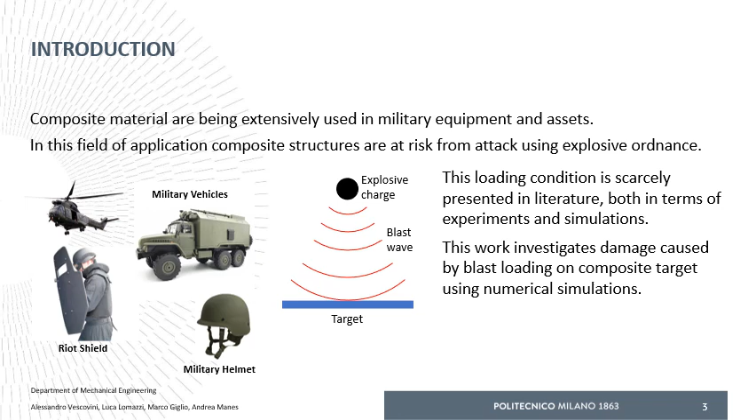This work focuses on composite materials that are being extensively used in military equipment and assets. In this field of application, composite structures are subjected to many risks, and the one we are focusing on is attacks from explosive ordnance. This loading condition is found by us to be scarcely represented in literature, both in terms of experiments and also in terms of numerical or analytical simulation. So what we wanted to do in this work is to investigate the damage caused by blast loading on composite targets using numerical simulation.

This work focuses on replicating damage in a carbon composite panel using the commercial software LS-DYNA. The experimental tests considered to compare with the FEM model are taken from the paper of Gargano and co-authors that is cited in the slide. The paper presents the detonation of a 100-gram spherical Type 4 plastic explosive charge at a 0.4 meter standoff distance from a flat quadrangular composite plate.

The composite is constituted by plain carbon woven fabric, made by 7 plies stacked one on the other, all the plies with the same orientation, being a 0/90 pattern. The composite plate is fixed in a steel frame lined with EPDM 414 rubber foam. The plate has a quadrangular shape, as said, with a 275 millimeter side, while the steel window, still quadrangular, has a 250 millimeter side.

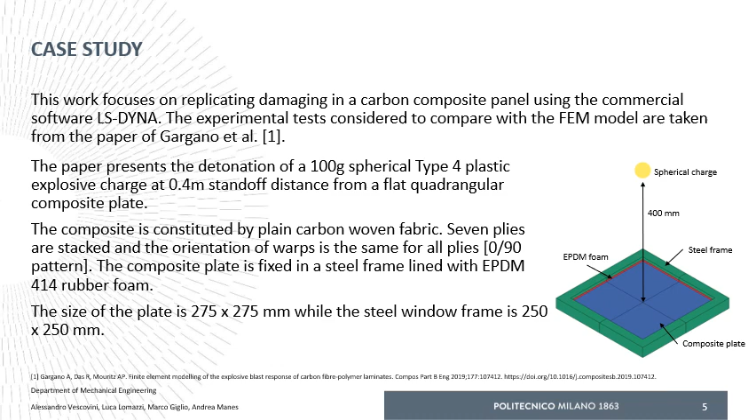In this slide, the two methodologies used are presented. First, the pure Lagrangian approach was used. It consists of modeling the structure with Lagrangian elements and applying the blast pressure with an empirical analytical equation, the Kingery-Bulmash equation. This method is generally addressed as the ConWep method.

Then, the fully coupled Euler Lagrangian approach was used. It consists of modeling the structural parts, so the target, the frame, and the rubber, with Lagrangian elements, while the Eulerian domain represents the air. The shock wave is initiated in the air domain by loading its upper surface, which is represented with the red arrow in the slide, with the analytical prediction from the Kingery-Bulmash equation from the ConWep method.

And this results in the possibility to significantly reduce the computational effort of this analysis, because it allows not to model the whole Eulerian domain that should also contain the explosive.

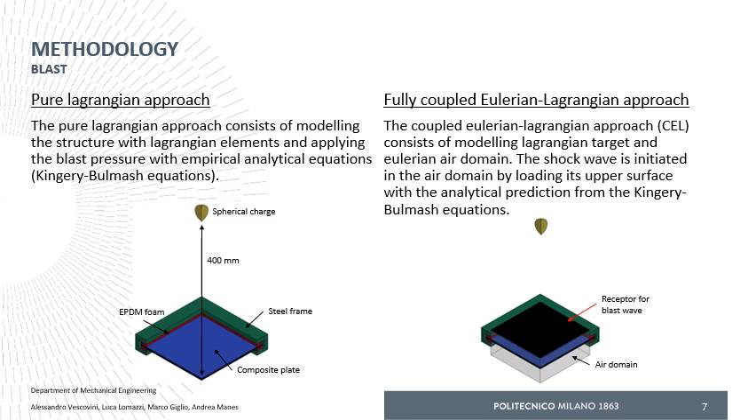Regarding composite modeling, the composite material was modeled applying a macro-homogeneous discretization. Namely, each ply was defined with a single layer of elements using the LS-DYNA software. The woven layers were modeled using fully integrated hexahedral elements having a characteristic dimension of 2 mm.

The material model MAT54 was used in LS-DYNA, and the damage initiation criterion considered is based on the Hashin criteria, with a modification accounting for the fact this material is woven. In this slide, the equations governing the failure criteria are presented.

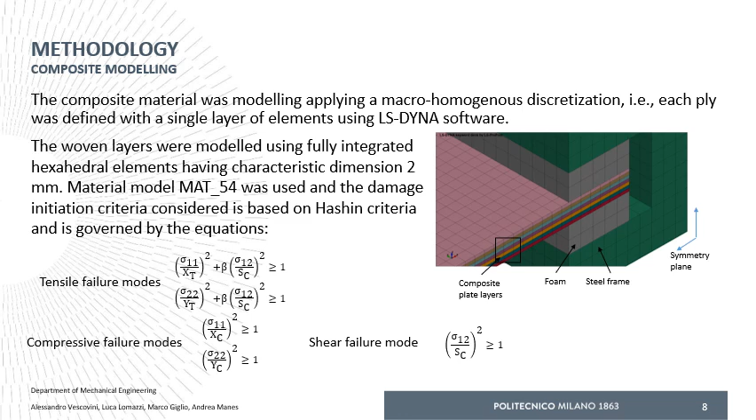The composite material was modeled also accounting for interlaminar damage, namely delamination. Delamination was accounted for with a contact interaction implemented in LS-DYNA that connects nodes belonging to adjacent layers. This contact interaction features a failure criterion that has a quadratic form.

The criterion accounts for normal stresses and shear stresses both in planes and out of planes, and its stress, normal and shear, is divided by the maximum allowable stress.

In order to reliably represent the loading condition, the whole experimental setup was modeled because it was found that the boundary condition dramatically influences the results. So steel was modeled as a purely elastic material, while the foam was modeled with the material MAT_057 in LS-DYNA, which is a material model dedicated to highly compressible low-density foams.

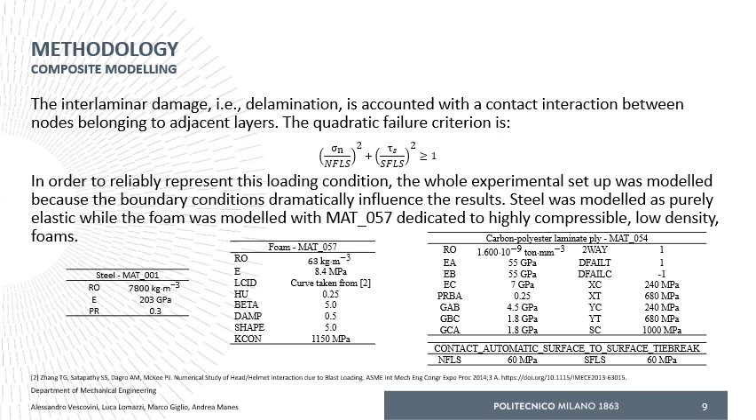Moving to the result and discussion section. In this slide, the results in terms of pressure and deflection are presented. In the first plot on the left, the pressure exerted on the composite plate is shown for the CEL and the Lagrangian approach. It can be seen that the ConWep method, the red line, reaches a higher pressure.

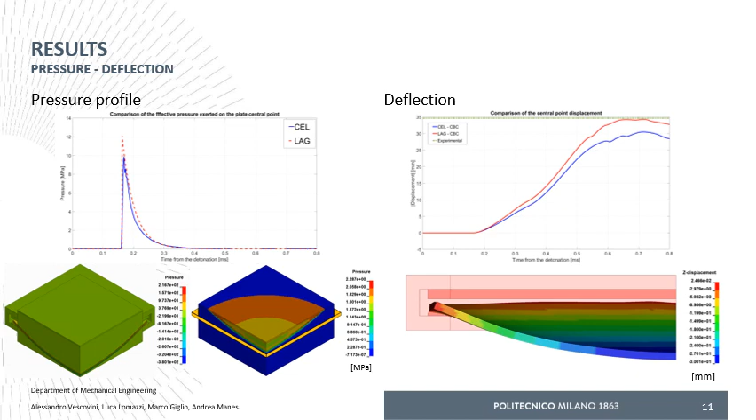This results, in fact, in the plot on the right, in a larger deflection for the composite plate that, in fact, reaches almost the experimental observation. The blue line, instead, from the CEL approach, reaches a lower level that can be still considered to be acceptable.

In this slide, the results in terms of intra-laminar damage are shown. In the first picture on the left, the experimental results from the paper of Gargano are shown. The black carbon plate features red dashed lines that underline the area where damage was observed. The picture on the right shows the numerical results from their analysis.

The picture was addressed in the paper as a ply rupture, and the ply rupture is defined in blue in the image. On the right, we can see the results from the pure Lagrangian and the CEL approach analysis we carried out. Again, the area in blue represents the elements where the failure condition was met.

Moving to the outermost ply, we can see that tensile damage is also present that instead was missing in the uppermost, or anyway upper plies. And at the same time, compression damage is also present in the outermost plies. The results from the two analyses, however, are very similar, so this also sort of confirms the reliability of these two methods.

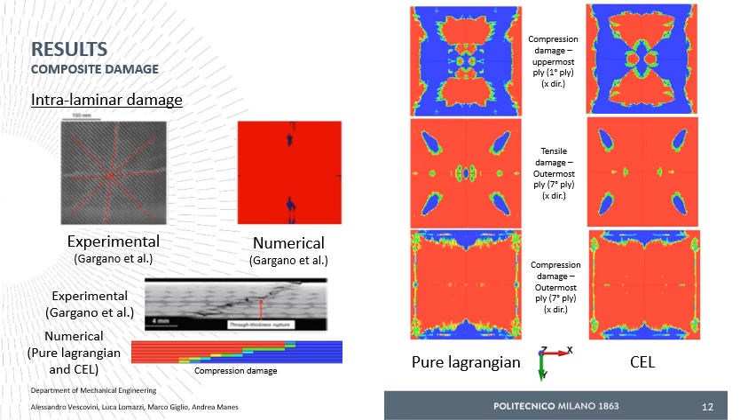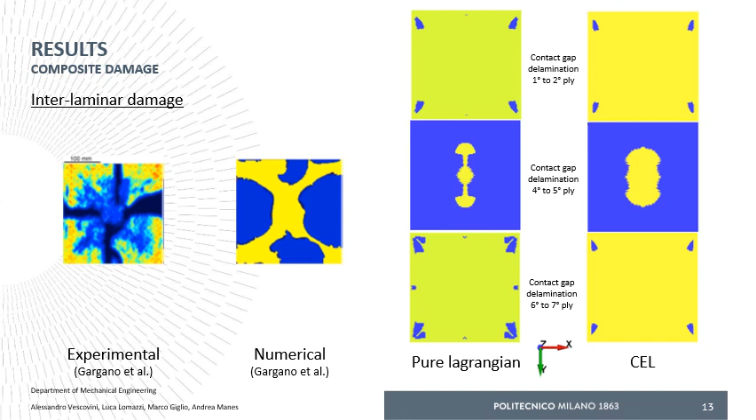Finally, moving to the conclusion, the presented methods to simulate the blast loading are validated and efficient to represent this event. In addition, the results in terms of pressure and composite plate vertical displacement are found to be close to those reported in the paper this work is based on, the paper from Gargano, while some discrepancies are found in the damaging of the composite lamina.

So further analyses are foreseen in order to improve the damage representation by investigating, for instance, other material models for interlaminar damage, and also perhaps by changing the method to address interlaminar damage, for instance, like cohesive elements. Also, to conclude, blast secondary effects can possibly be considered in order to obtain a more comprehensive description of the phenomena occurring.